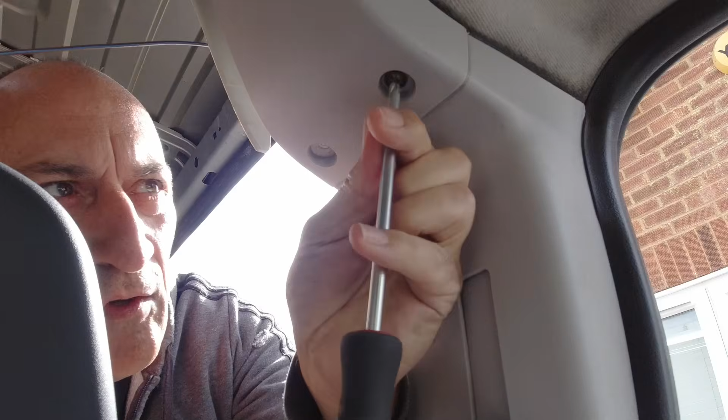Small little self-tapping screw like that. Do two this side, two the other side, then we can remove the plastic clips.

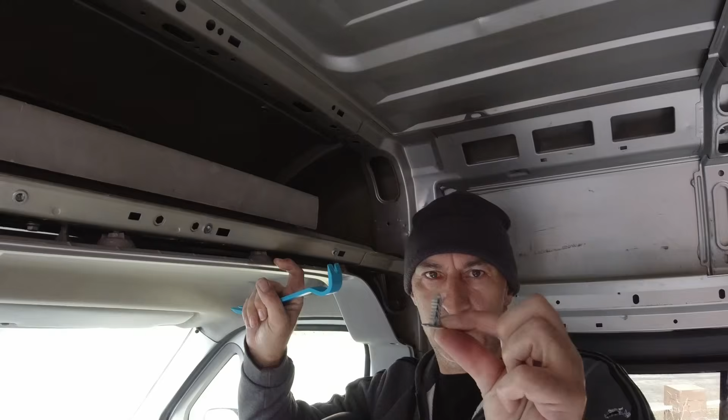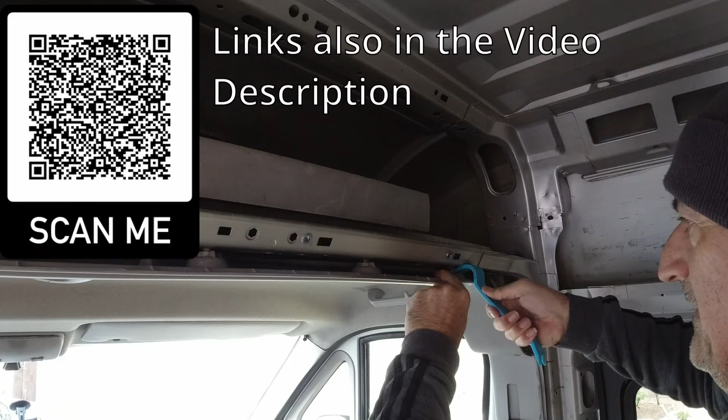That's it. Holding this initial bit of plastic trim up is these little plastic clips, so it's handy to have a tool like these trim removal tools where you can get in there and just pop them off. They're quite tight. You just have to gradually work them out like that. They will come out eventually.

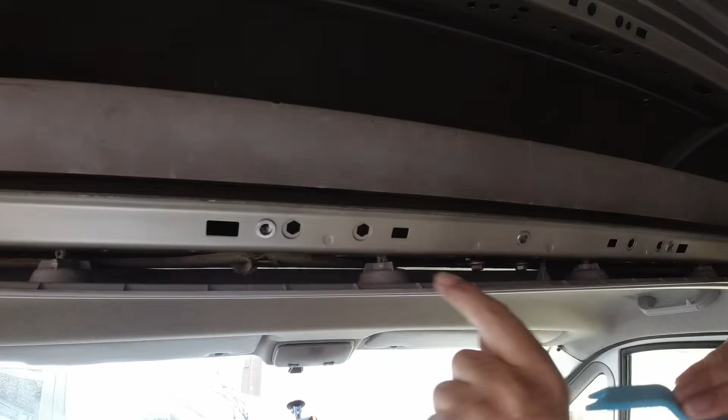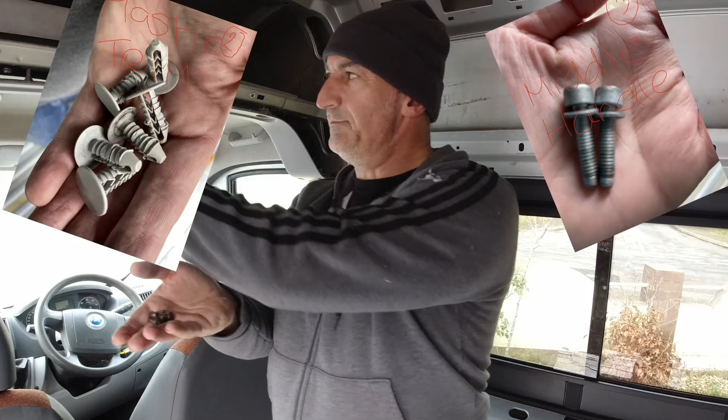A little tip, when you're taking stuff apart, they'll have loads of different types of screws. So at each stage, when you've got that little set of screws, take a photograph of it on your phone, write a little note on it that these are for this bit of trim, and then when you come to put it back together, you'll have all them pictures to refer to.

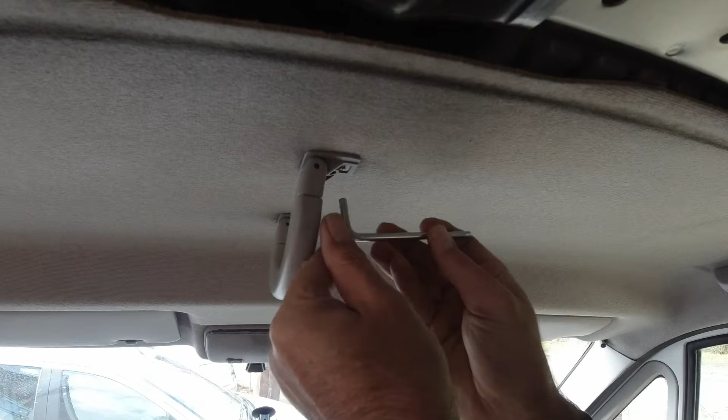The grab handle in the middle of the shelf is held on by these Torx screws, the little flower pattern screws. So with either your impact driver or an Allen key, we'll just remove these two. There we go.

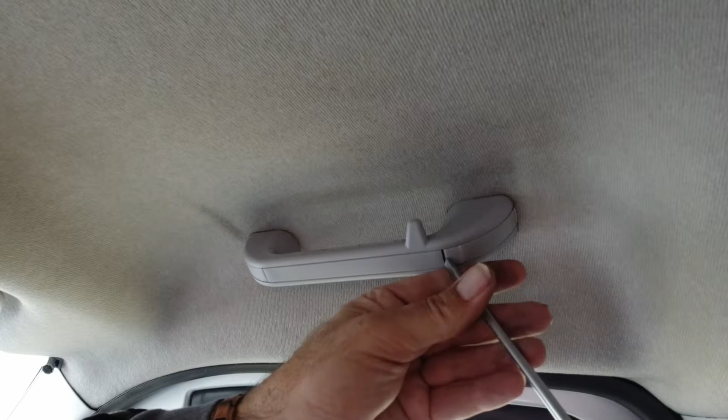Right, to get these little grab handles off on the side, there's this plastic trim that pops out like that. Get a little flat bladed screwdriver in there. Just pop. And then inside those are the Torx head screws, but they're a long way in there, so use one of these Allen keys, reach down inside there and they should come undone. That one was quite easy.

And I'll show you a little trick if they're really tight. I'll leave that one for a minute. What you can do, reach down with the Torx head key and with a little ring spanner, slip that over the end of your Allen key, and then that gives you a little bit more leverage to turn that and undo that screw. These have got little washers on them, so don't lose the washers. There, like that. Okay.

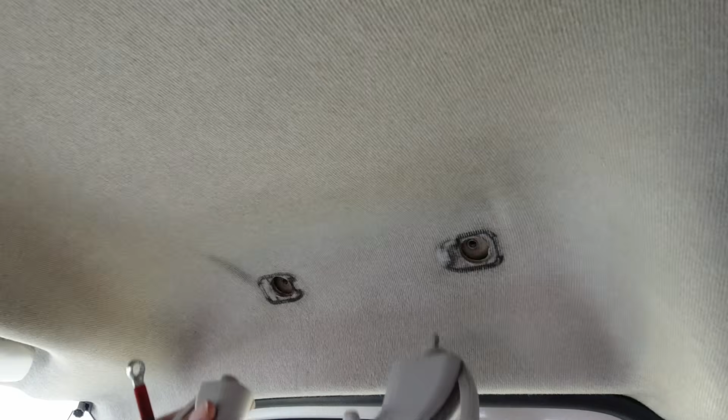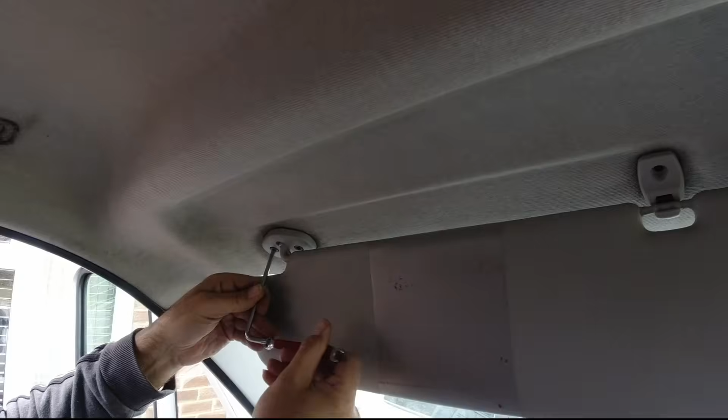That's it. Now with the sun visors, they're held on with these Torx bits. So again, if they're a bit tight, that one's okay, use the little spanner trick again to undo them if you need to. Spanner on the Torx head. Oop, wrong way around. Oh, that's it. Just give you that little bit of extra leverage. To this one. That's it.

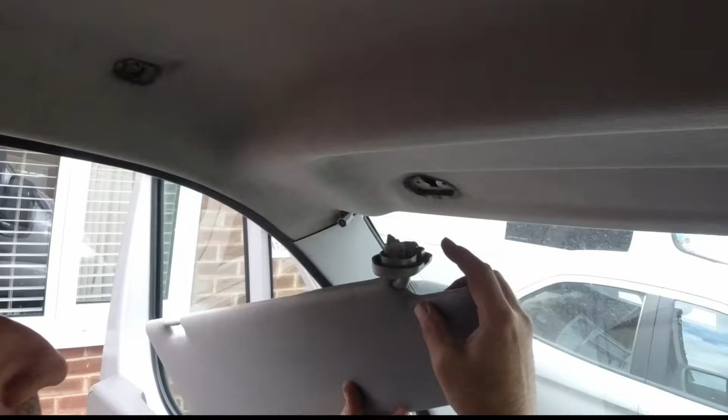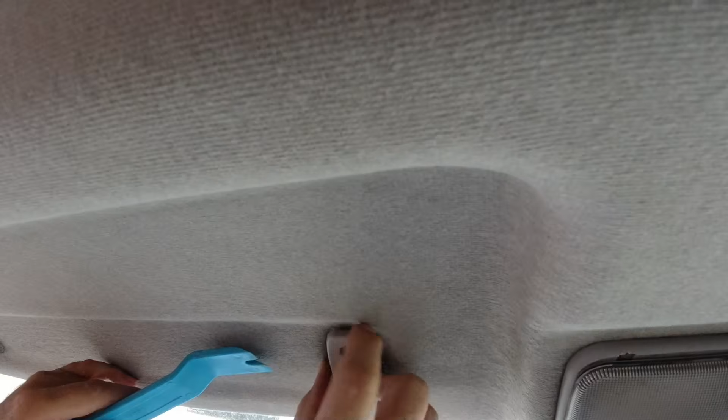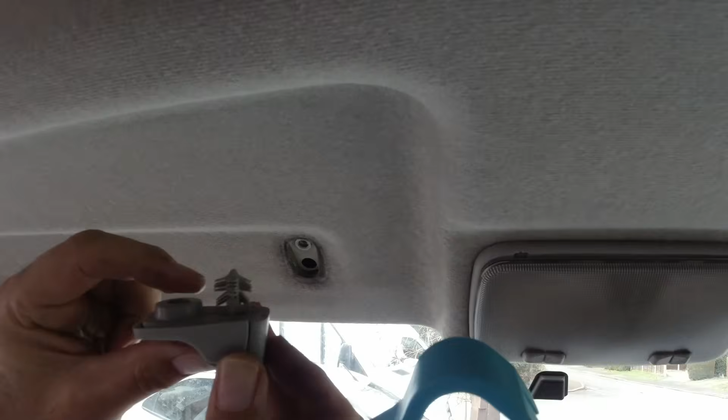And then just pull them forward because they've got that little lip there. See that, which is hooked onto the front of the metal of the cab. And then this one, once you've got the screw out, is actually held on by a plastic clip. So you need one of the trim removal tools. Give a bit of leverage, they are quite tight. So it's got one of these little Christmas tree clips in there, you need to pull that out.

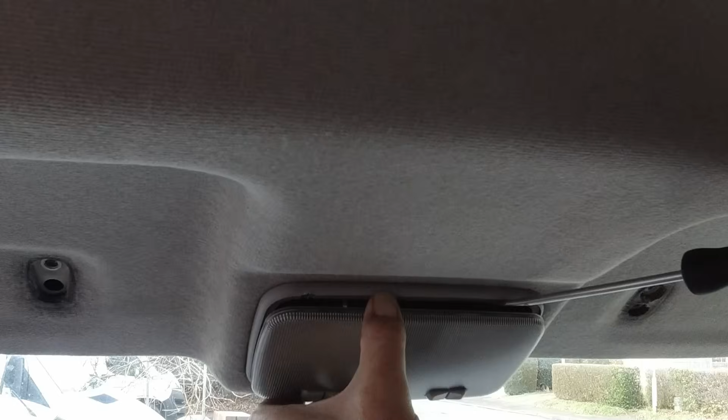Now with this central light console, I can see there's a screwdriver slot here and here, and it looks like somebody's already had this off, maybe to replace a bulb. So we'll just pop a screwdriver in there and just gently twist it just to tease that out. I can see the clips there. So that should, yeah, that should just pop out. There we go.

Yeah, and sure enough, there's a couple of Torx head bolts just inside there. So flat bladed screwdriver in the top where those slots are, give it a little twist, that should come out quite easily. Undo the little clip. There we go. And then Torx head bit in here to remove the plastic.

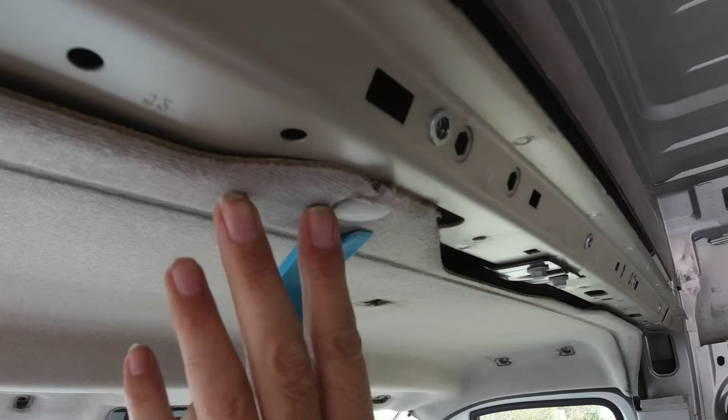And then there's one last plastic trim clip in the centre here, which needs to come out. Again, they're quite tight, some of these. If you do end up damaging them, you can find replacements for these on eBay fairly cheaply.

That's all the nuts and bolts out that hold the headliner in. The last bit that holds it in place is the door rubber itself. So that literally just pops off. So you give it a tug. It's only pushed on there. You only need to take this top bit off, just to about here. A couple of screws in there, nails rather. And just to about here, and then once we've got the headliner out, we can temporarily just put that door rubber back for now.

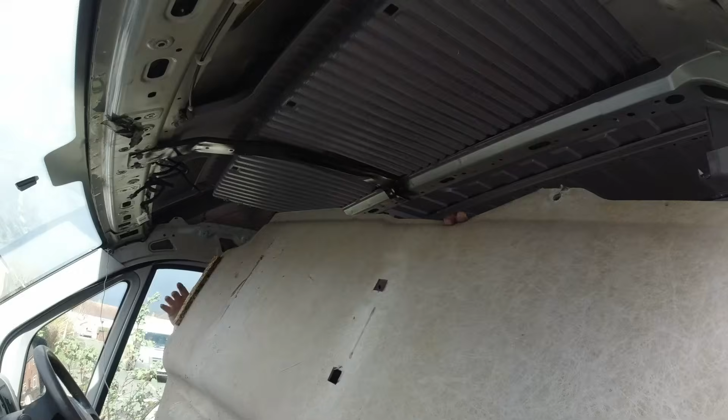But this is all loose now, so right, that's everything out now, so this should be free to come out. There we go.

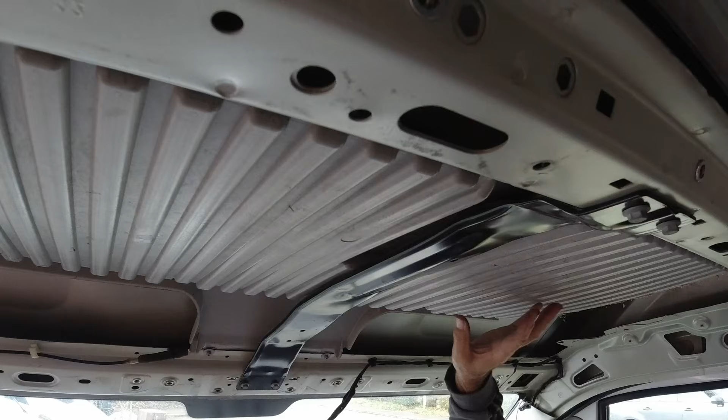In addition to the fabric headliner, the Ducatos and Relays and Boxers have this plastic parcel shelf above the headliner, so you can use that storage cubbyhole without deforming the headliner, I guess. For some odd reason, the person who had this van before us has cut this plastic shelf right the way through here, so we're actually going to have to source a second-hand one of these and put that back, because obviously there's no shelf in this location. So for now we'll just take it out.

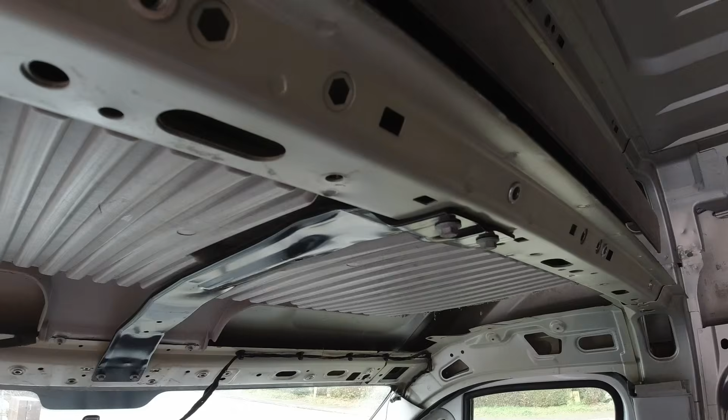It looks like 4mm Allen bolts holding it to the structure of the van, so again it's just a case of undoing these little bolts and then this should all pull out. There would be 4 along this front edge holding this in.

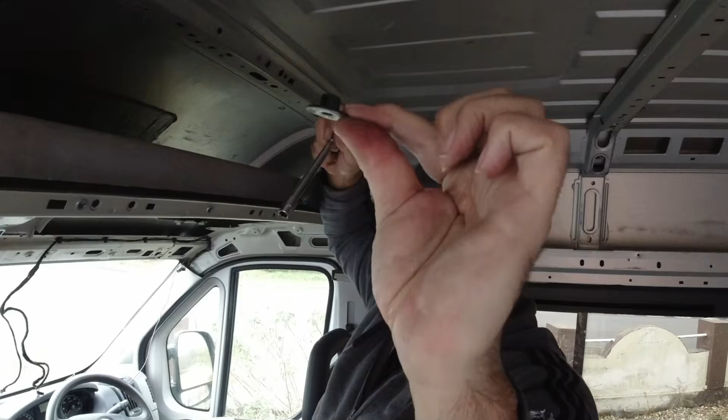So holding this plastic shelf down, reach over the top and you can feel some little plastic nuts there, 10mm nuts, so 10mm socket on top of that nut, just like a little nylon nut, and the bolt will be captive in this, so you won't lose the bolt. There's the little nut there. So there's normally 3 nuts along the back here.

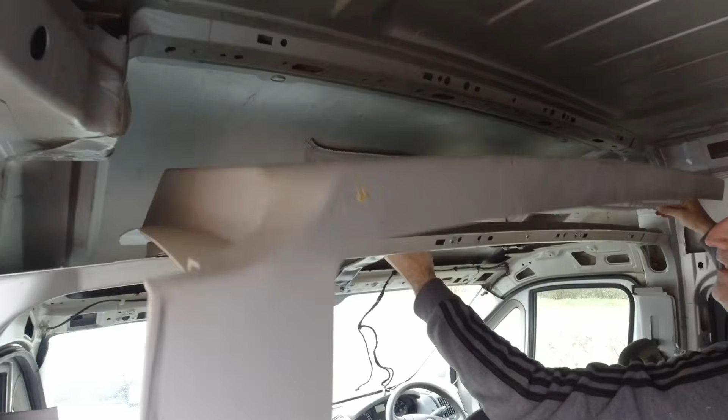That then releases the shelf, and then it's just plastic clips pushed over the edge of this metal edge at the front, so it just wants pulling back, and then that's it, out of the way, clear. So that's a fairly simple operation. Get that out. Now you can see that gives us great access to this overcab area.

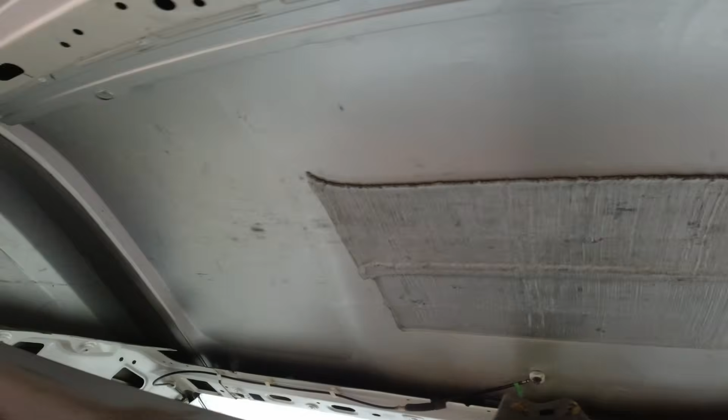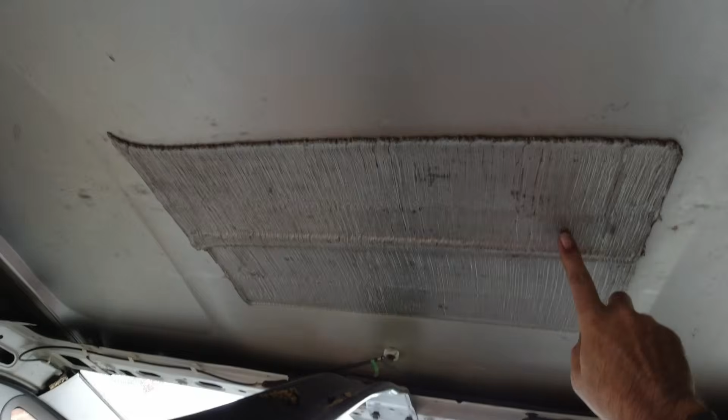We can properly insulate this metal skin, and you can actually see there what the manufacturer has done in the way of sound deadening. That's obviously some kind of material they put on there to add some mass to this panel to make it a bit deader, to stop it resonating. So we won't need to do any additional soundproofing. We can just stick our closed cell foam insulation all over that cab roof, and then that'll prevent any condensation in future.

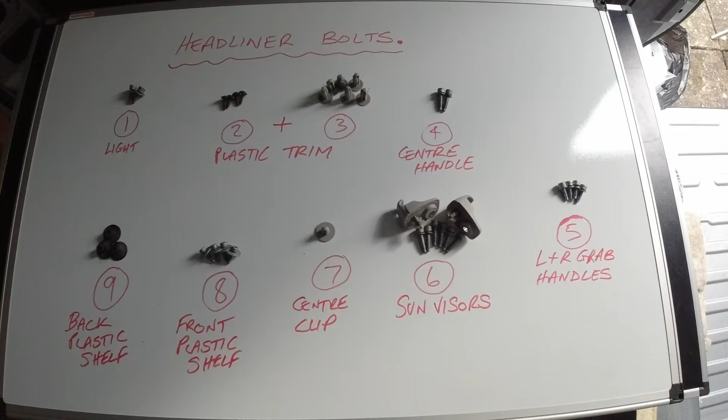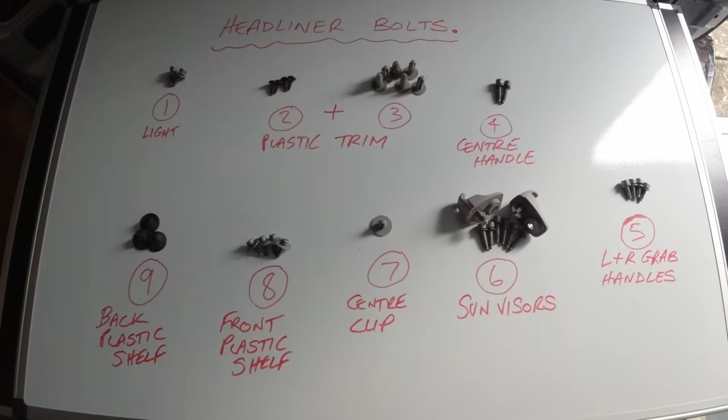And then we simply reverse the steps to put the headliner and the plastic shelf back. So to help you out, if you need to do this operation, we've numbered the order that we took the screws out in when we removed it, and Lou took some photographs of the bolts, and this was the order that they were removed in. So we started off with the courtesy light.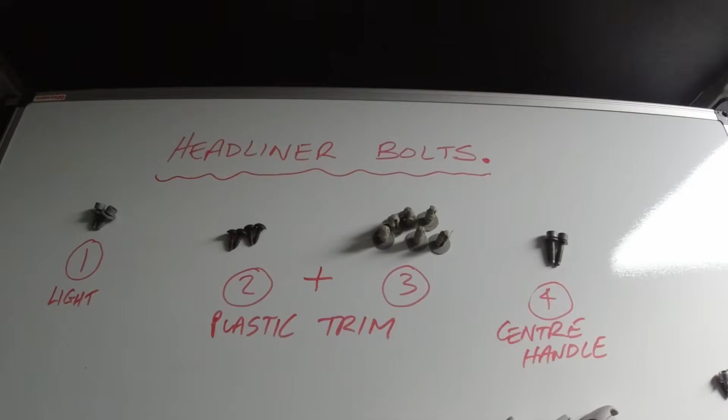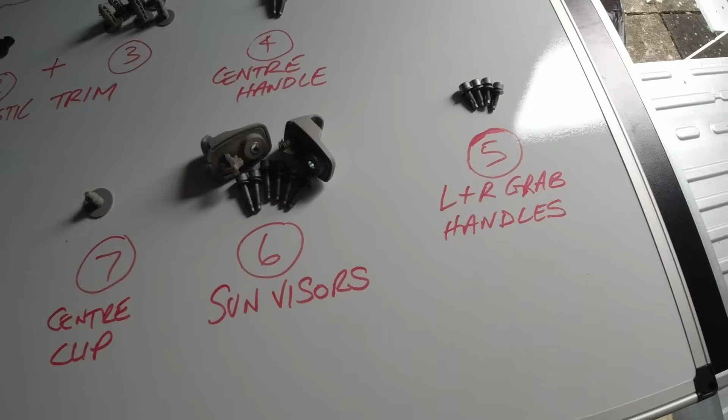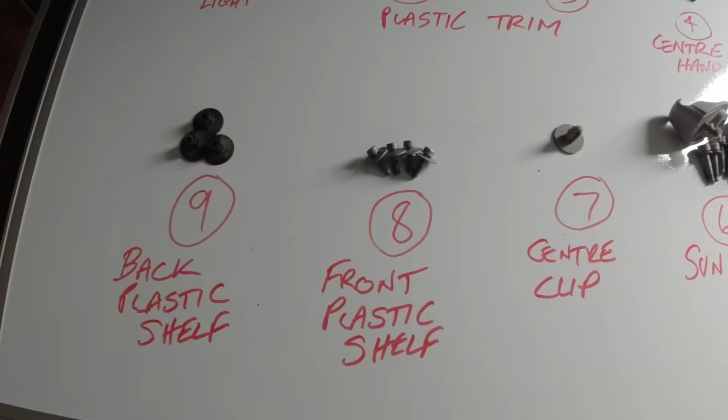Then there was a plastic trim at the back of the headliner, a combination of some screws and some plastic fittings to remove that. The centre grab handle, the left and right grab handles. Then we removed the sun visors, and then there was lastly just a centre clip on the headliner. The headliner then came out, and then that left just the plastic shelf. So there were 4 screws or bolts at the front holding it onto the metal at the front of the screen, and then there were these 3 nuts holding it onto the back.

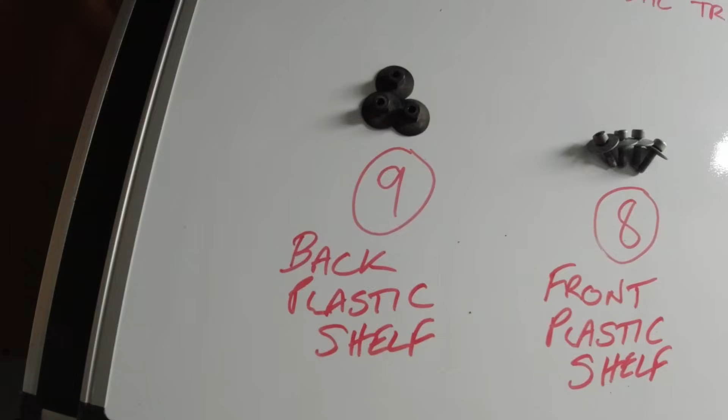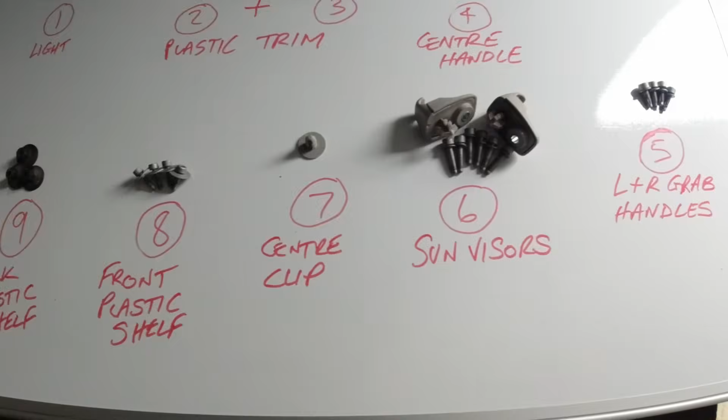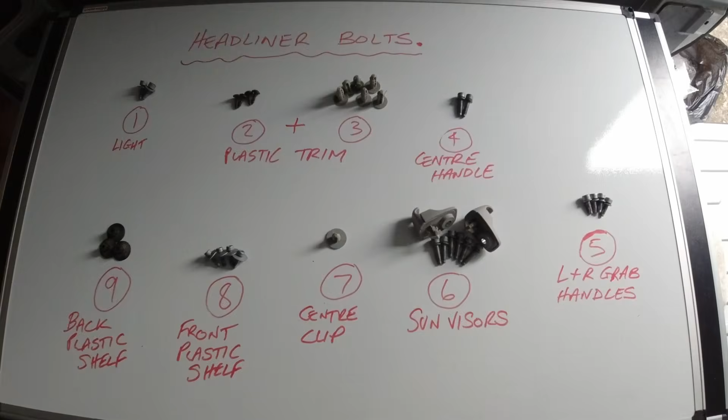So all we need to do now is basically reverse this process. So start with these at number 9 and work our way back round, and the last thing we'll fit is the centre light fitting. So I'll just freeze frame that there for you. You can pause the video if you need to, and that'll help you when you come to do this.

Okay, so that covers the removal of the bulkhead and the headliner and the plastic shelf. I'm going to do these videos in individual tasks, just because if you want to look at a specific task, you don't necessarily want to look at something else. So I'm going to break them down into individual sections, and then they'll be clearly labelled and titled. They'll be in the sequence that the build was done, and hopefully by doing it that way, that'll help you.

Now that the parcel shelf and the headliner are out, obviously we insulated the roof of the van, and I've got some really detailed information that I need to share with you regarding the insulation to the roof of the van, what insulation we've used and the reasons why we've used it. And I've got some facts and figures that I really want to share with you, which will hopefully also help you as well. So in the next video, we're going to be doing a little bit of science and some facts and figures on the insulation, why I've chosen this particular insulation. I'm going to be showing you how we fitted it all, and then we're going to be putting the headliner back in.

And then it's really a case of mitigating any condensation that's potentially going to build up above that cab area. Now with that stuck on there and that vapour barrier, that'll be nice and warm up there. There won't be any issues with condensation above the cab.